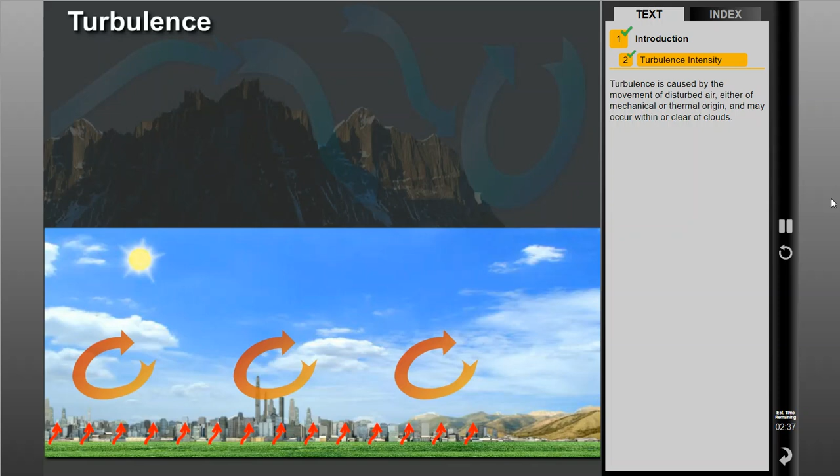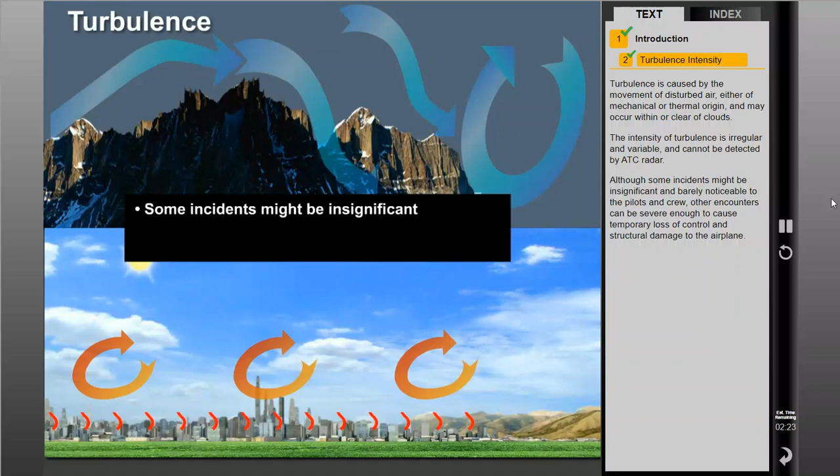Turbulence is caused by the movement of disturbed air, either of mechanical or thermal origin, and may occur within or clear of clouds. The intensity of turbulence is irregular and variable and cannot be detected by ATC radar. Although some incidents might be insignificant and barely noticeable to the pilots and crew, other encounters can be severe enough to cause temporary loss of control and structural damage to the airplane.

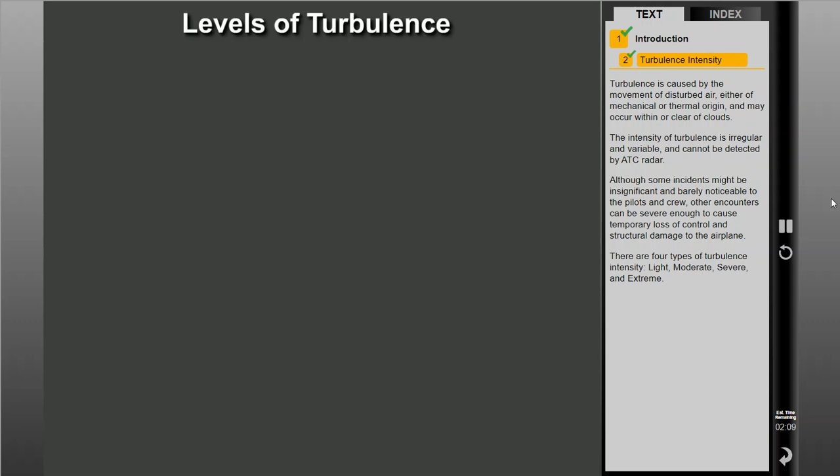There are 4 types of turbulence intensity: light, moderate, severe, and extreme.

Light turbulence momentarily causes slight erratic changes in aircraft attitude and altitude. During incidents of light turbulence, unsecured objects in the cockpit and cabin may be displaced slightly. The flight crew and passengers may also feel a slight strain against seatbelts and shoulder harnesses.

Moderate turbulence is similar to light turbulence, but is of greater intensity. Noticeable changes in altitude or attitude occur, and are usually accompanied by variations in the aircraft's indicated airspeed. During moderate turbulence, crew and passengers feel a definite strain against seatbelts and shoulder straps, unsecured objects are dislodged, and walking is difficult.

Severe turbulence causes large, abrupt changes in altitude or attitude, large variations in indicated airspeed, and can cause momentary loss of aircraft control. When experiencing severe turbulence, aircraft occupants are forced violently against seatbelts and shoulder straps, unsecured objects are tossed about the aircraft, and walking is impossible.

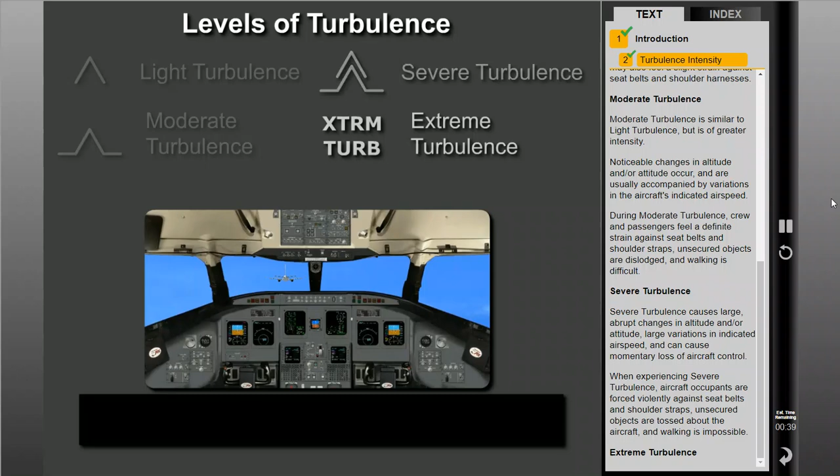Extreme turbulence is the most dangerous of the 4 levels. At this level of intensity, the movement of the aircraft is violent and practically impossible to control, and can result in structural damage.

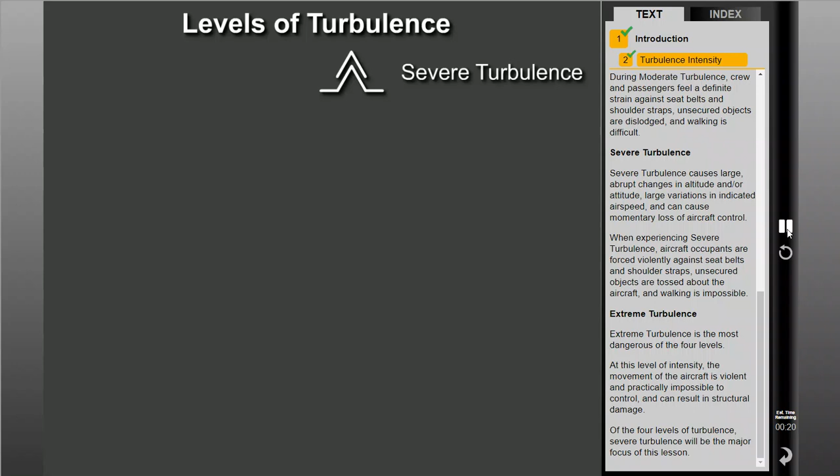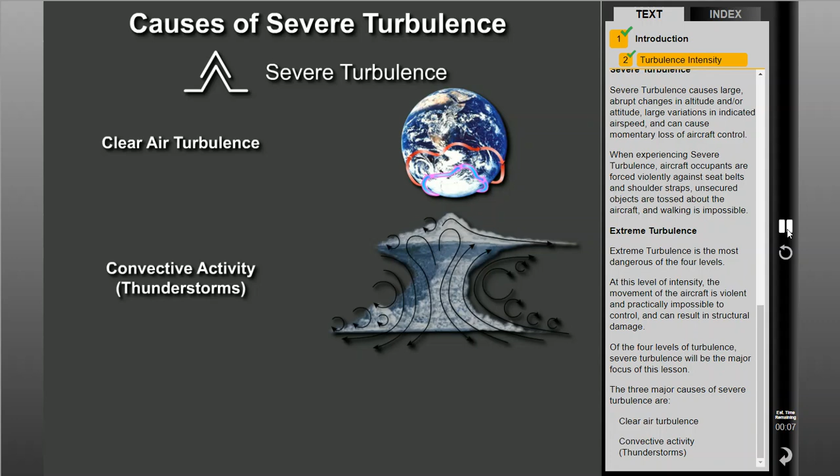Of the 4 levels of turbulence, severe turbulence will be the major focus of this lesson. The 3 major causes of severe turbulence are clear air turbulence, convective activity or thunderstorms, and wake turbulence.

Clear air turbulence, or CAT, is defined as turbulence that is not associated with clouds. Clear air turbulence usually occurs at altitudes above 23,000 feet, and at times can be severe.

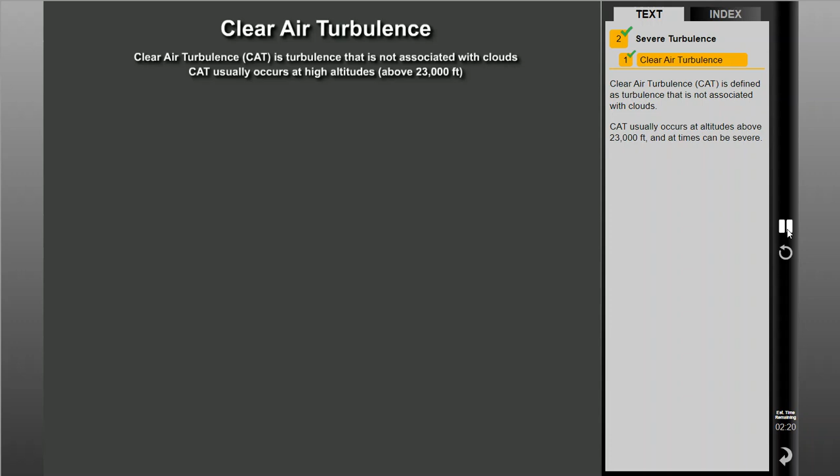2 common causes of clear air turbulence are the jet stream and mountain ranges. Clear air turbulence near the jet stream is caused by a rapid change in wind velocity gradient, where slow-moving air is adjacent to rapidly moving air.

Mountain wave clear air turbulence is the result of air being forced to rise up the windward side of a mountain and then sinking down the leeward side. This mixing of air develops into turbulent airflow downstream of the mountain, creating breaking waves, rotors, and eddies.

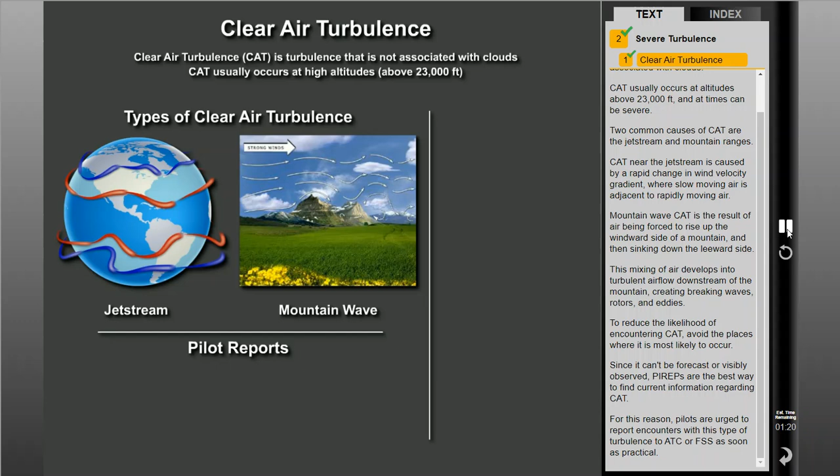To reduce the likelihood of encountering CAT, avoid the places where it is most likely to occur. Since it can't be forecast or visibly observed, pilot reports are the best way to find current information regarding clear air turbulence. For this reason, pilots are urged to report encounters with this type of turbulence to ATC or a flight service station as soon as practical.

When filing a PIREP with a flight service station, it is important to provide concise information in the following order: aircraft location, time of occurrence in Zulu time, turbulence intensity, whether the turbulence occurred in or near clouds, aircraft altitude or flight level, and type of aircraft.

Over Omaha VOR, 1232 Zulu, severe turbulence in clouds at flight level 310. Aircraft is the Citation Bravo.

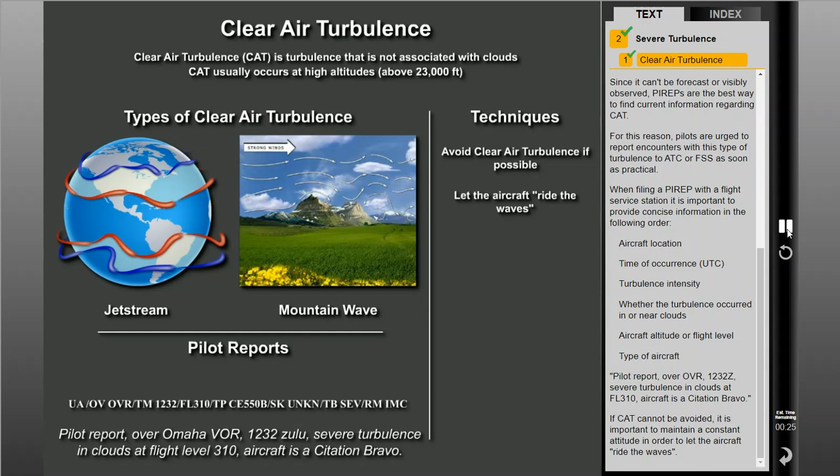If clear air turbulence cannot be avoided, it is important to maintain a constant attitude in order to let the aircraft ride the waves. Try to keep a constant pitch attitude to maintain a constant airspeed. Also, maintain a constant turbulence penetration power setting for the recommended turbulence penetration speed. Do not try and maneuver, as this increases load stress on the aircraft.

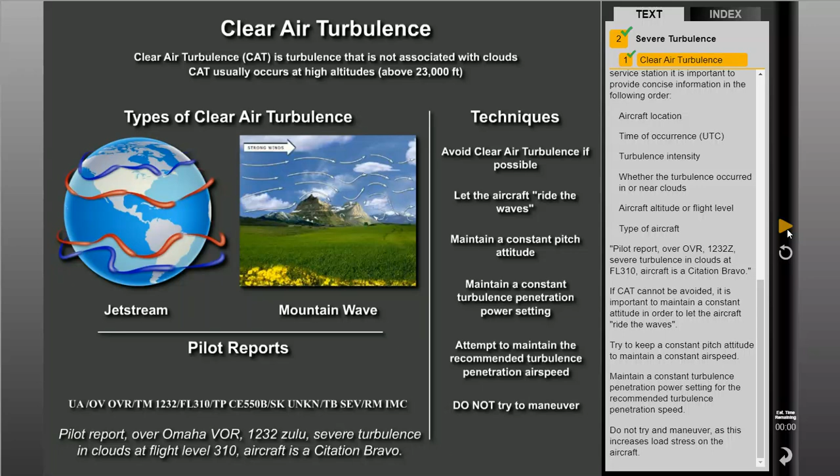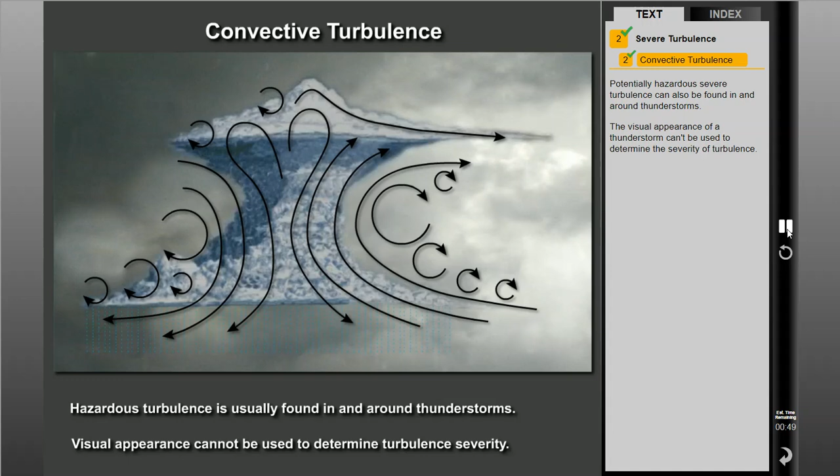Potentially hazardous severe turbulence can also be found in and around thunderstorms. The visual appearance of a thunderstorm can't be used to determine the severity of turbulence. Keep in mind, a visible thunderstorm is only a portion of a turbulent system, where updrafts and downdrafts often extend far beyond the visible storm cloud.

Shear turbulence may be encountered in an area up to 20 miles laterally and several thousand feet above a severe storm.

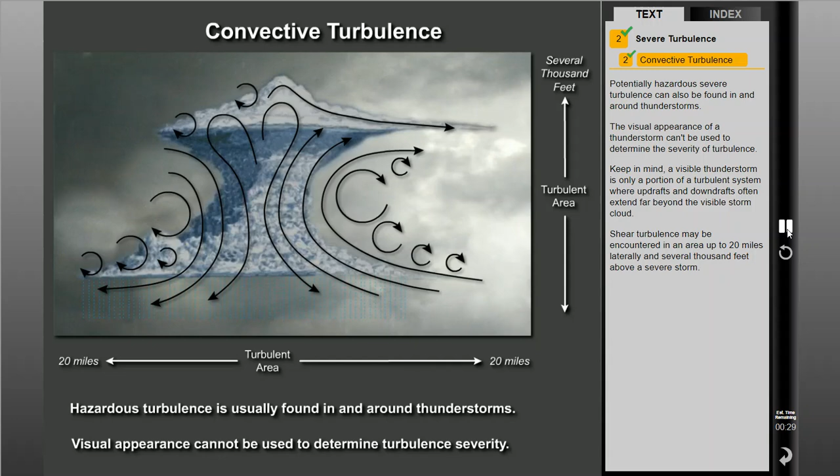Airborne radar can be used indirectly to assist in the detection of turbulence. Radar waves reflect areas of moderate to heavy precipitation, which is usually where the most turbulent areas of a storm are located. As a general rule, the frequency and severity of turbulence increases with radar reflectivity.

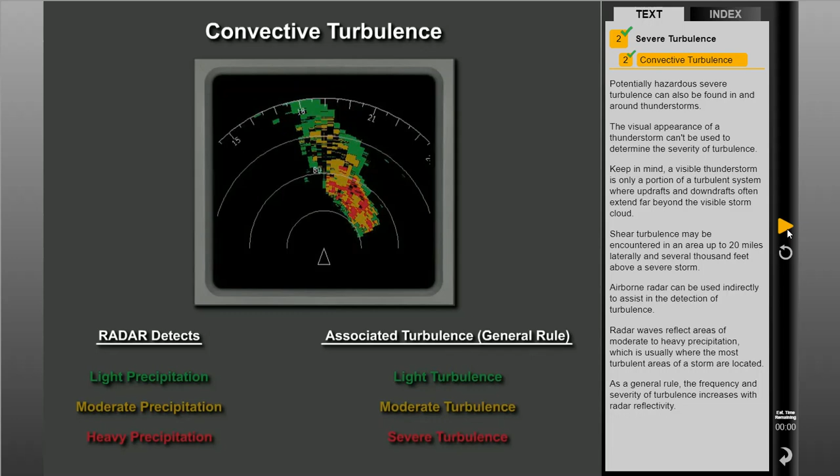Severe turbulence can also be caused by other aircraft and can pose a significant hazard when encountered in flight. All aircraft generate a disturbance in the air behind them, known as wake turbulence, caused by a pair of counter-rotating vortices trailing from the wingtips and outboard flaps if in use.

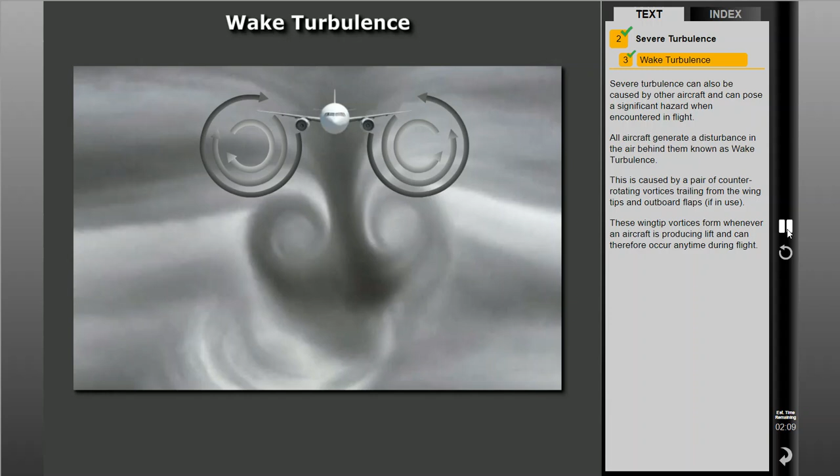These wingtip vortices form whenever an aircraft is producing lift and can therefore occur anytime during flight. The strength and intensity of the vortices are determined by the weight, speed, and configuration of the aircraft. A heavy, slow, and clean configuration aircraft produces the highest intensity of turbulence.

Flying through the wake turbulence of a larger aircraft can induce a roll that may exceed the roll control capability of your aircraft.

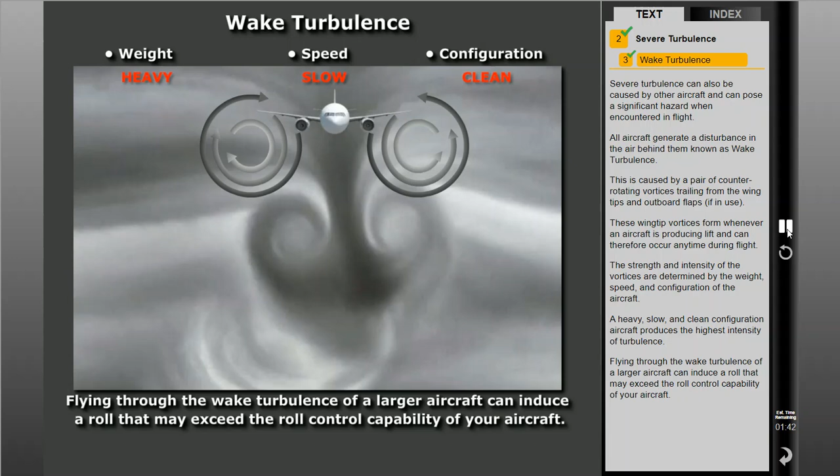Wake turbulence is especially hazardous in the region behind an aircraft during the takeoff or landing phases of flight, when slower airspeeds and a high angle of attack maximize the formation of strong vortices.

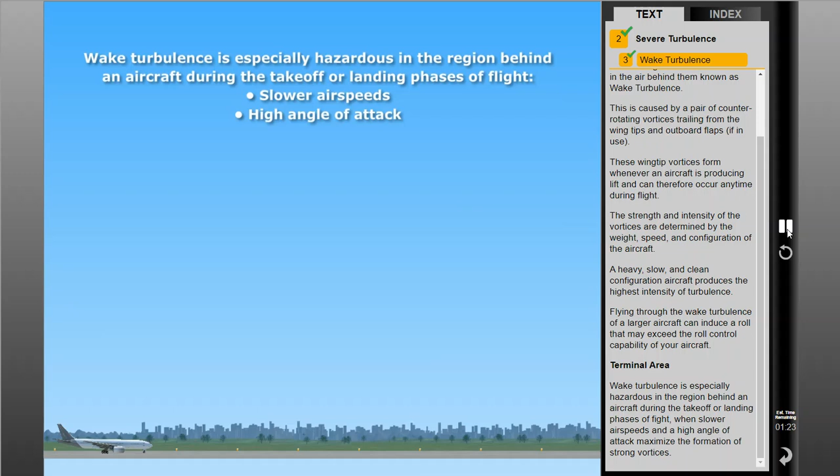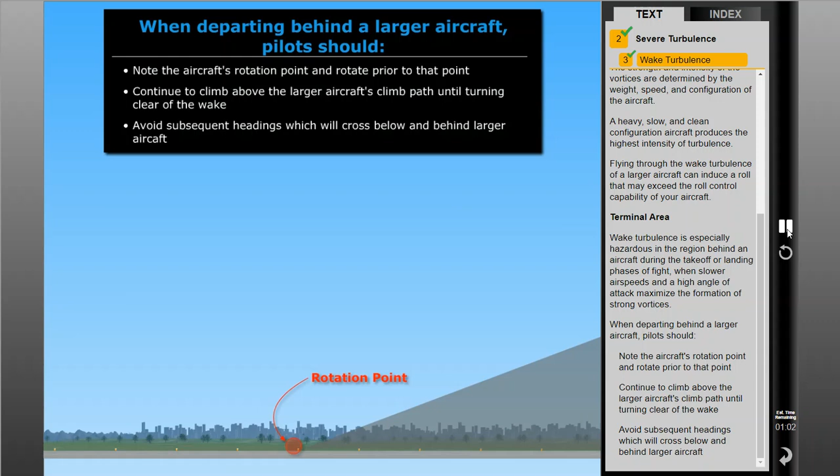When departing behind a larger aircraft, pilots should note the aircraft's rotation point and rotate prior to that point, continue to climb above the larger aircraft's climb path until turning clear of the wake, and avoid subsequent headings which will cross below and behind larger aircraft.

When landing behind a larger aircraft, pilots should stay at or above the larger aircraft's final approach flight path, and note the touchdown point and land beyond it.

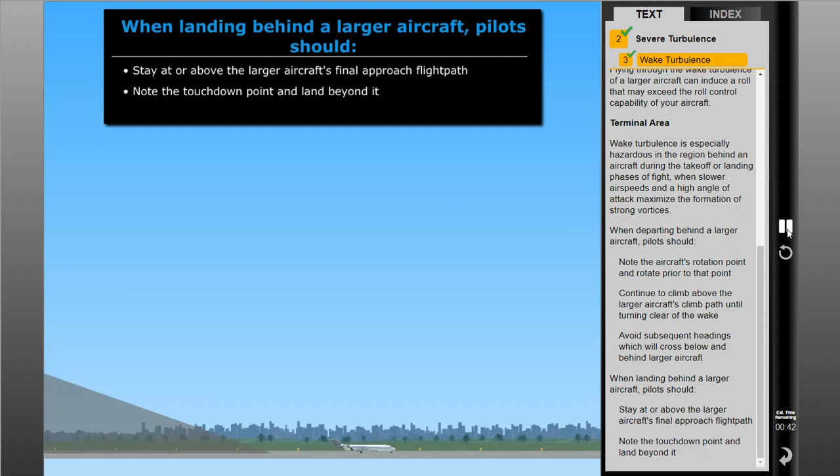Although speeds are higher during cruise, due to the reduced air density at high altitudes, aircraft can still produce wakes of severe intensity during the cruise phase of flight.

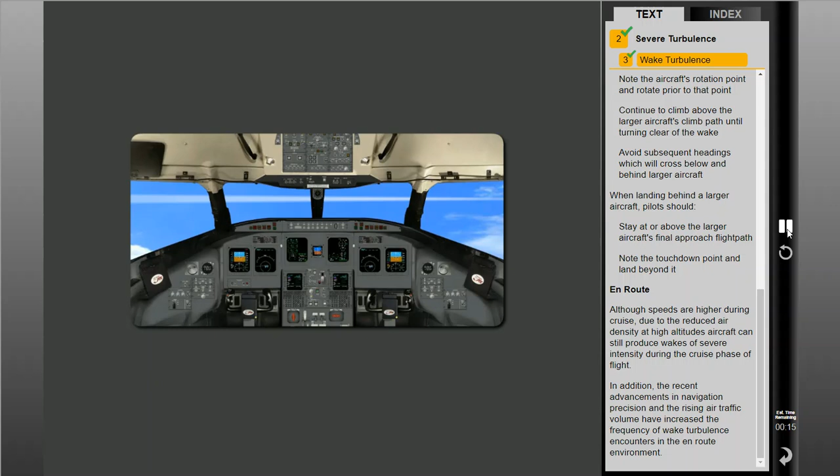In addition, recent advancements in navigation precision and rising air traffic volume have increased the frequency of wake turbulence encounters in the en route environment. For an in-depth discussion of this hazard, refer to the en route wake turbulence encounters lesson.

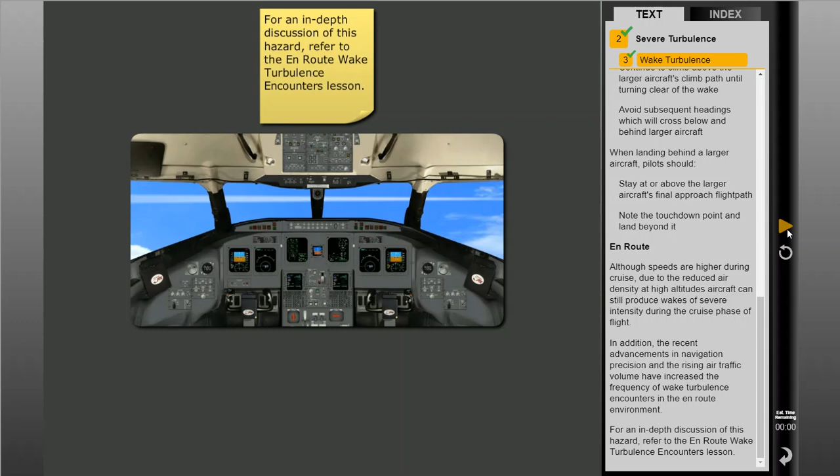Turbulence is the leading cause of injury in non-fatal accidents, with cabin crew members being injured at a disproportionately higher rate compared to passengers.

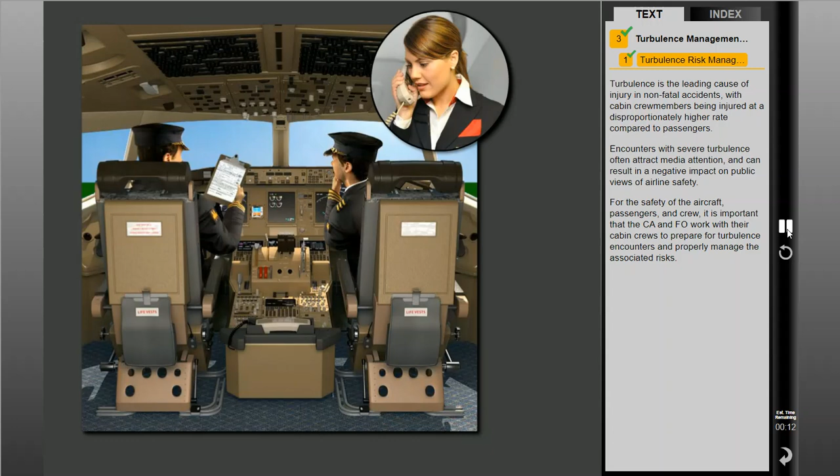Encounters with severe turbulence often attract media attention, and can result in a negative impact on public views of airline safety. For the safety of the aircraft, passengers, and crew, it is important that the captain and first officer work with their cabin crews to prepare for turbulence encounters and properly manage the associated risks.

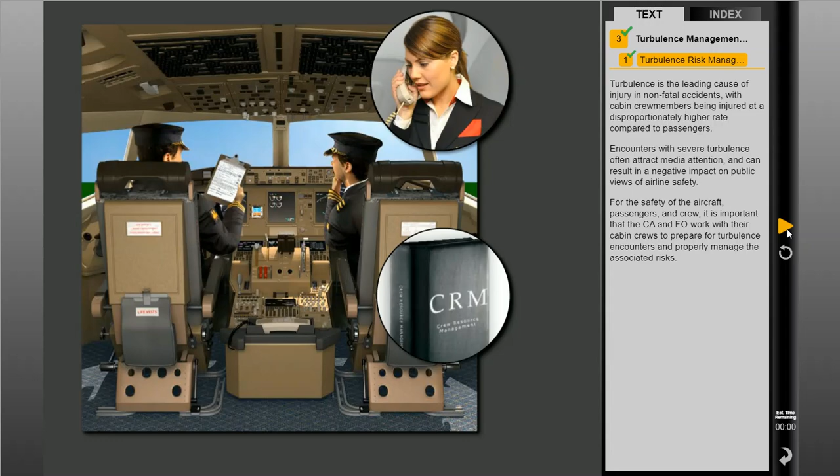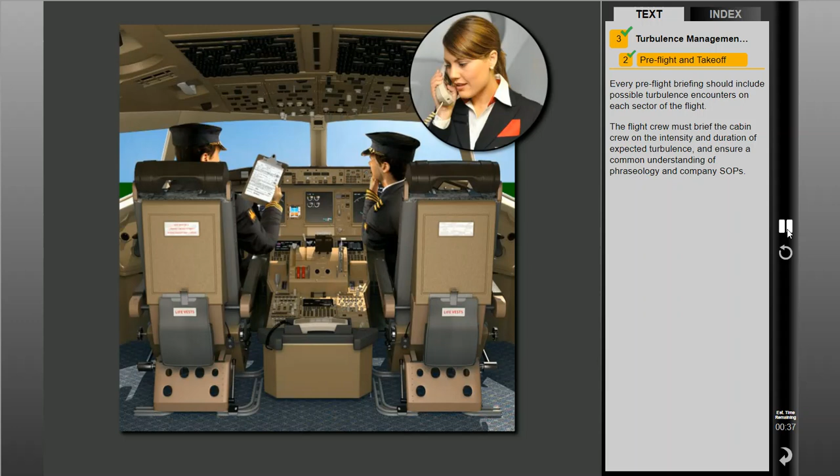Every pre-flight briefing should include possible turbulence encounters on each sector of the flight. The flight crew must brief the cabin crew on the intensity and duration of expected turbulence and ensure a common understanding of phraseology and company SOPs.

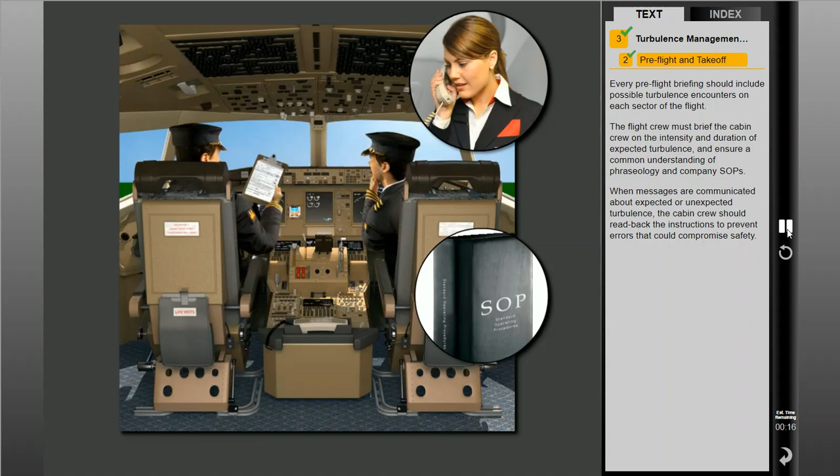When messages are communicated about expected or unexpected turbulence, the cabin crew should read back the instructions to prevent errors that could compromise safety. To prevent injuries as a result of turbulence during takeoff and climb, the cabin crew must ensure all passengers, baggage, overhead lockers, and galley equipment is secure prior to takeoff.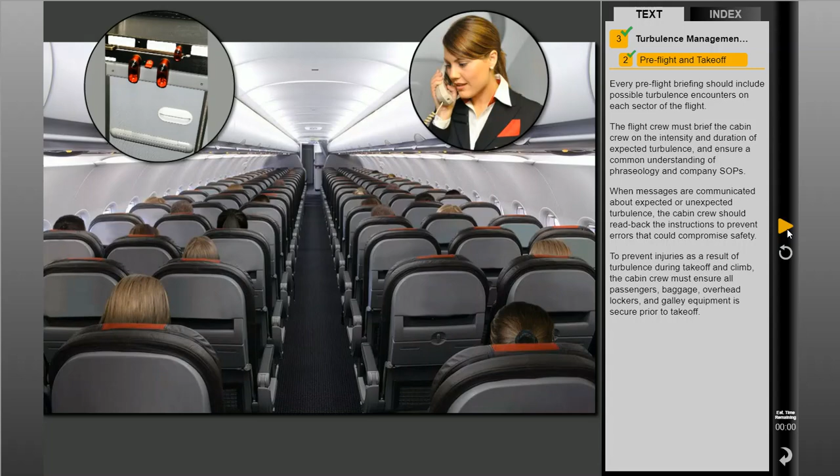Whenever turbulence is experienced in flight, especially when at moderate levels or higher, the crew should take appropriate steps for self-preservation first and foremost.

Often, what the cabin crew experience at the rear of the aircraft can be very different from what is being experienced at the front of the aircraft.

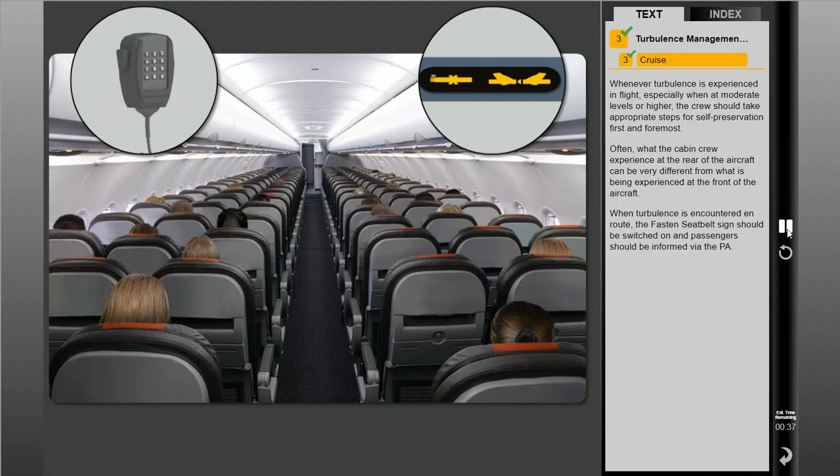When turbulence is encountered en route, the fasten seatbelt sign should be switched on, and passengers should be informed via the PA. Cabin crew should stow all service items, conduct compliance checks, and secure themselves in their seats.

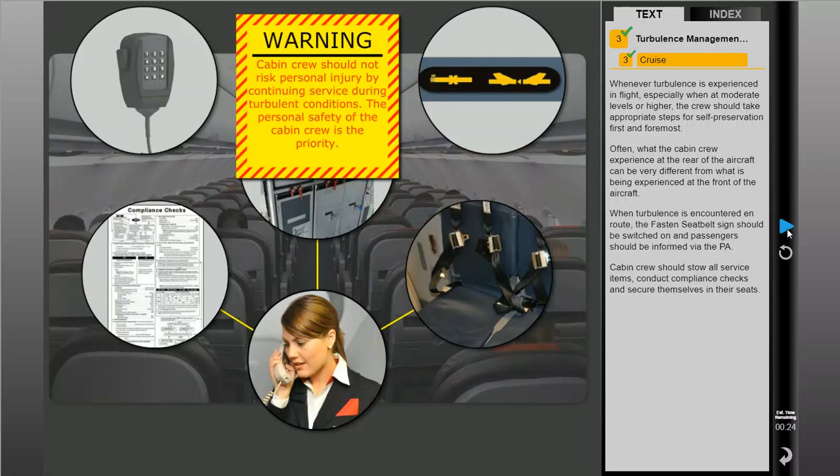After an encounter with moderate or higher turbulence, the pilot in command should advise the cabin crew when it is safe to resume duties, and direct them to check for passenger and crew injuries, administer first aid if necessary, and check the cabin for any damage.

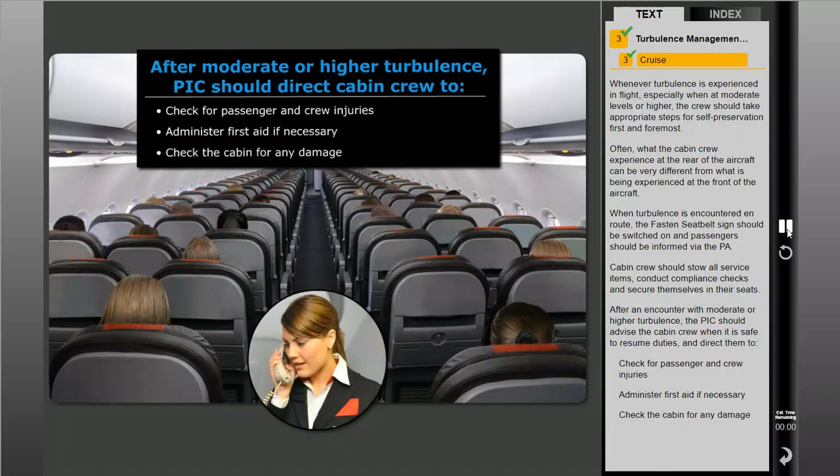If turbulence is anticipated on descent, the flight crew must be aware that securing the cabin may take 10 to 15 minutes, and should therefore inform the cabin crew well in advance. Once the aircraft has begun its descent for approach and landing, the fasten seatbelts lights should be turned on.

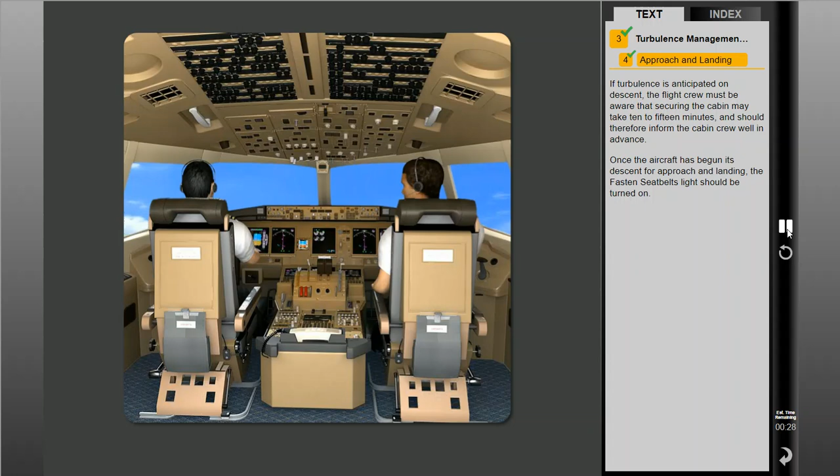Cabin crew should confirm that all passengers, baggage, overhead lockers, and galley equipment is secured, and all crew are at their assigned stations with seatbelts and harnesses fastened.

This concludes the turbulence lesson.